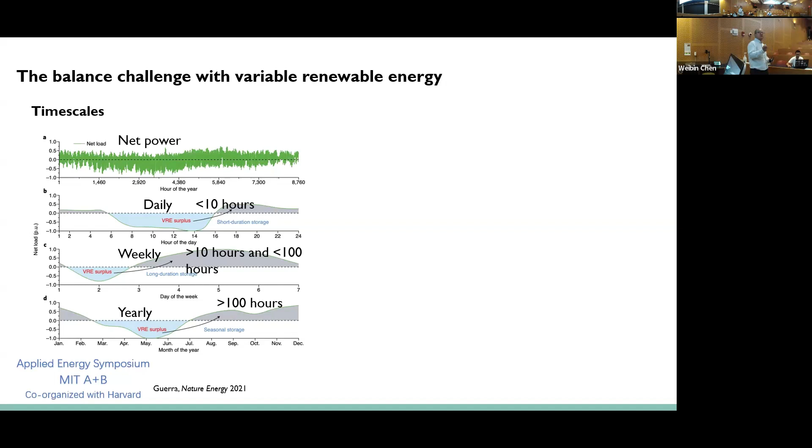So as mentioned, the topic I'll talk about is energy storage and flexible technology in the context of energy system and the network. Within the decarbonization or net zero transition, there will be a lot of challenges around the temporal spatial variability and also the flexibility. So here's one example in a typical zero carbon, net zero system using solar and wind. Different time scales require energy shift, from daily, like several hours, to weekly, between 10 to 100 hours, and yearly, mainly for seasonal energy storage or energy shift to support the balance within a zero carbon system.

But also there are different locations. The first one is mainly from the energy balance perspective. For the second one, you definitely have infrastructure transferring energy from generation through the transmission and distribution lines to the demand. Depending on where you are, you probably also have limits or constraints on what you can use and how to use your energy storage or different technologies.

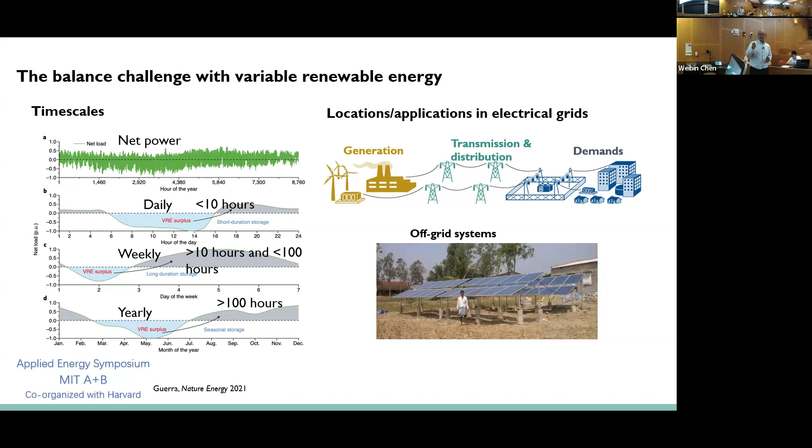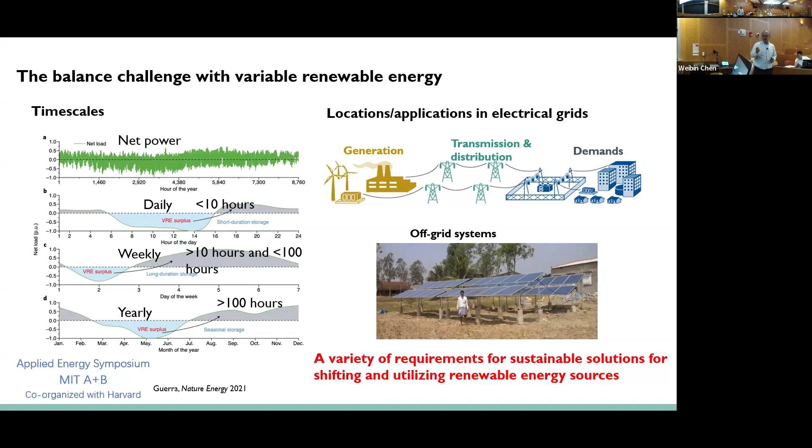And the third one: we are all talking about an established national grid or energy system. There are also problems like off-grid systems, in rural areas in developing countries, or in the US or UK, developed countries, remote areas that need off-grid or distributed energy system solutions. So there are a lot of requirements for solutions to address the temporal spatial variability induced by the renewable energy system. So our group focuses on mainly two different topics.

First, we develop system approaches, energy system and network. I'll give you some examples of what I mean by this. We believe in the net zero transition, the electrical grid and renewable energy will be the fundamental sources to supply all other infrastructure, like water systems, the carbon cycle, the food supply chain and many other systems we are currently using. So we want to understand the interlink between the different systems and how we can use renewable energy to support other system transitions, including the electrical or energy system transition.

At the same time, we also look at whether we can leverage the other infrastructure to help balance renewable energy, addressing the temporal spatial variability I mentioned in the previous slide. So to improve cooperation between different systems, we also look at what we call interfacing technology. Basically, there will be something like energy storage, so you can store and convert energy in different forms. Also carbon capture, which can link the energy system with the carbon cycle or carbon capture, storage and utilization system.

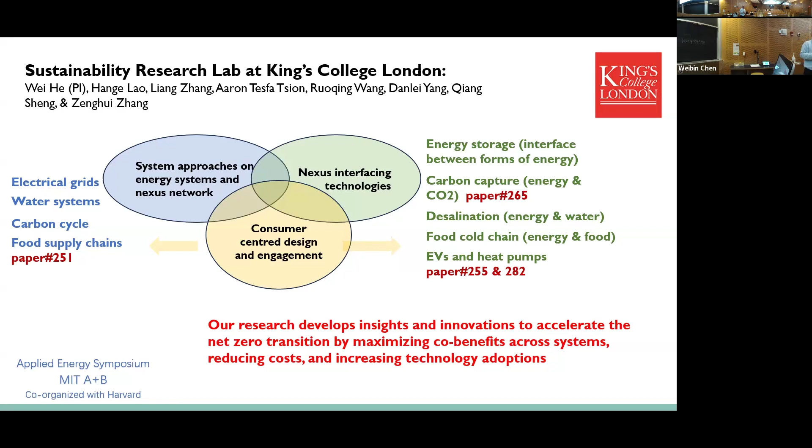One of the other very important points we are focusing on: we want to integrate user preference, behavior, or perspective into the technology design to try to increase technology adoption and accelerate the transition. Because we have several other papers focused on different topics, in this talk I mainly talk about energy storage and flexible technology for sustainability in our group.

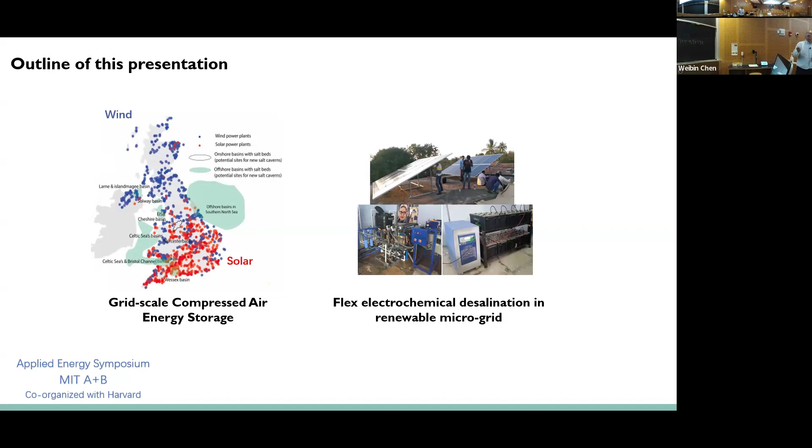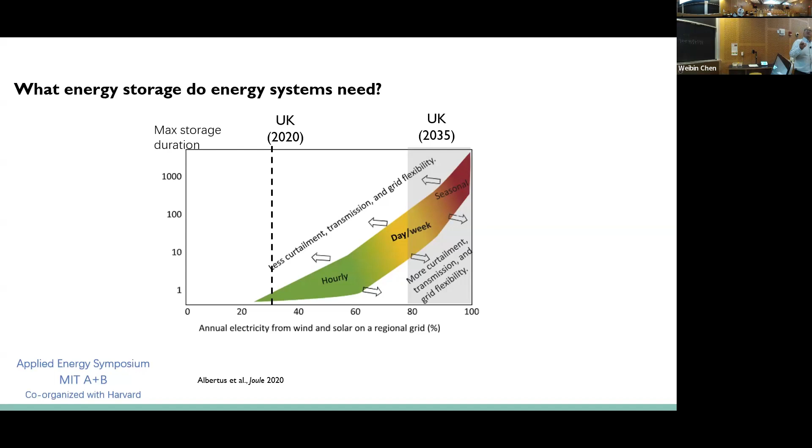But with increased penetration of renewable energy on the grid, for example in UK which aims to have a low carbon or net zero grid around 2030 or 2035, it means you probably need 80% plus renewable energy on the grid. During that time, you definitely need much longer energy storage to meet the energy system requirements and maintain balance. So in this context, longer duration energy storage, which needs to deliver energy over tens of hours, hundreds of hours, is greatly needed to ensure we can have a stable and reliable electrical grid with highly penetrated renewable energy.

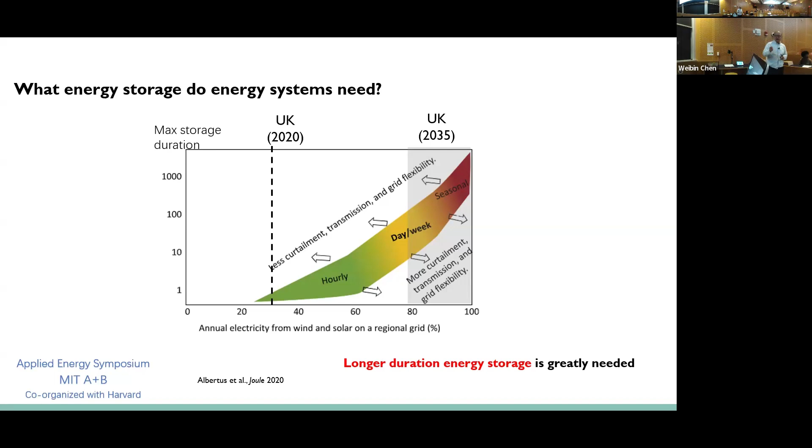When we talk about longer duration, that means you probably provide one cycle per week, so you only have about 50 cycles a year. If we talk about even longer time, we probably anticipate 10 times the duration requirement, at even 1/10 of the price point for the longer duration energy storage technology.

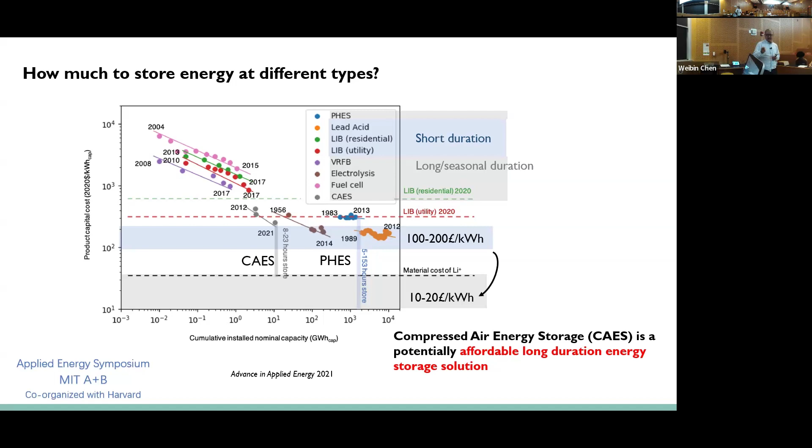So what we did, what is compressed air? That's one of the technologies we are focusing on. It's not a new technology - it was first launched in the 1970s in Germany. Basically, when you have off-peak electricity, you use a compressor to pressurize air and store the pressurized air in some container or underground caverns. When you need electricity, you mix the compressed air with a gas turbine to increase the temperature, so you have both pressurized air and high temperature pressurized air, which can produce more energy. But in a traditional system, it uses natural gas.

But in the new context of the energy transition, people want to get rid of the gas. So with the new technology called adiabatic, that means it doesn't require any external heat.

In the adiabatic compressed air energy storage, when you have electricity, you still use a motor to drive a compressor to produce pressurized air. Because the air pressure is increased, the air temperature also increases. So in adiabatic compressed air energy storage, you store the heat and the pressurized air separately. You let the heat be stored in the thermal energy storage, and you store the pressurized air in the air tank.

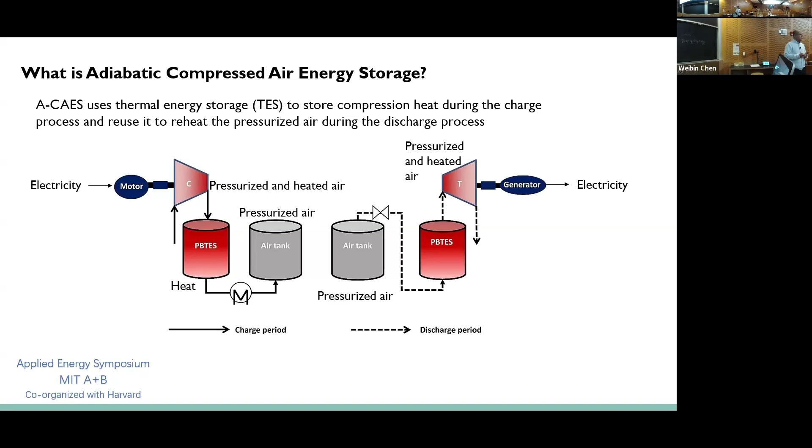So when I said we are developing the technology, basically we look into individual components. We try to see, in the underground cavern, how the heat exchange of the air at different conditions, different locations, different forms of storing air, interacts with the environment, with the cavern, with the surrounding environment.

We also do very technical detailed simulation of the thermal energy storage, the thermal plant, the thermal distribution within the plant across different designs. We look into turbomachinery design across different components, and we integrate them as a whole in the system.

So I will not talk too much about technical details, but in general, what we are doing here is trying to understand how the design parameters of individual components link with the overall system's static and dynamic performance.

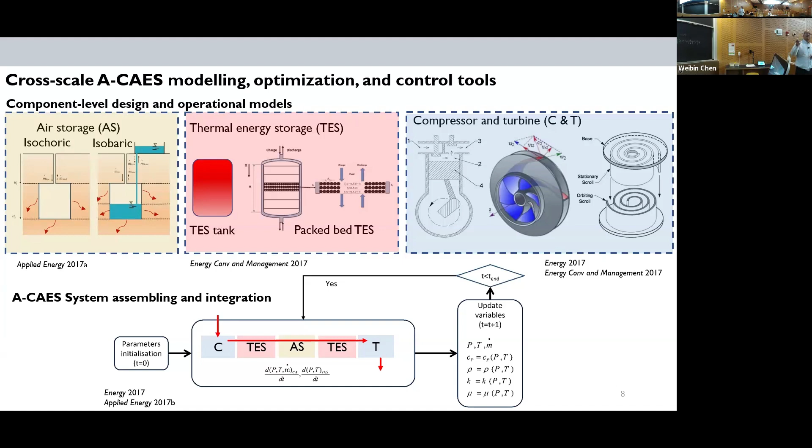Which can help us design individual components according to some system-level signals, like if we want the energy storage technology to participate in the arbitrage of the electrical market, what should we do, which component we need to operate, which component we need to optimize, and how we do that is through the whole integration modeling framework we developed.

And another example, we also want to evaluate how geological resources like underground caverns can support large scale energy storage technology to decarbonize the energy system.

So we look into the UK-based current gas storage facilities, underground salt caverns. We map all the locations on the left-hand side. The yellow circle represents the different volume of existing gas storage facilities in the UK.

And there's all the transmission lines, we built a model of the UK electrical system. We also built all the power generation, including both gas power plants and solar and wind, into this power system model.

On the right-hand side, which we have not actually considered in the model, the green and red areas indicate the potential resources available in the UK to have further caverns, for different types of gas storage. It could be used for compressed air, hydrogen, or CO2 storage.

But in general, the figure here represents another kind of feasibility study. In general, the resources available, for example in the UK, for underground salt caverns, is much more than enough in the near future, or at least for the energy transition, as far as we are aware.

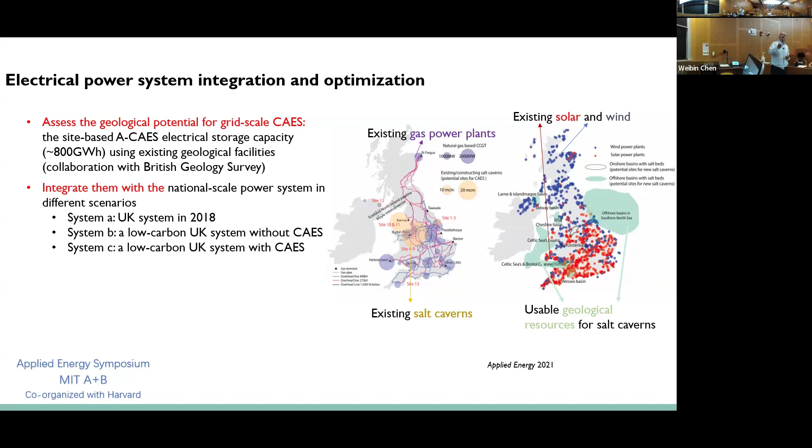In this analysis, we assume the 2018 UK energy system with compressed air energy storage, with no other energy storage available. So 3 scenarios will be considered: the real or almost real UK system in 2018, a low carbon UK energy system with increased generation from solar and wind without energy storage, and the same low carbon UK system with increased solar and wind plus 800 gigawatt hours across certain storage sites.

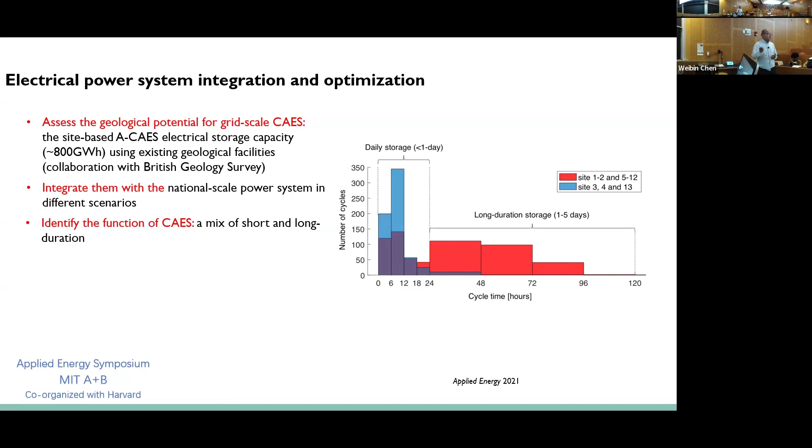The results show that depending on different operational and storage parameters of the compressed air system, different sites offer different energy storage for different durations. Some more efficient energy storage sites provide daily storage, less than 1 day operation. Others, less efficient due to geometrical constraints or variables, provide mainly longer duration energy storage. This depends on the parameters or specification of the caverns and the operation parameters in the modeling.

Overall, we compare the 3 different scenarios to understand the different function of the compressed air energy storage, because different geometrical parameters give different performance. Increasing the use of 800 gigawatt hours compressed air energy storage could increase the use of energy storage by reducing curtailment by about 53% compared to systems B and C, without and with energy storage facilities. The use of existing underground gas storage facilities for compressed air and variable renewable generation can reduce electricity emissions by 85%, with about 28% cost increase compared to 2018.

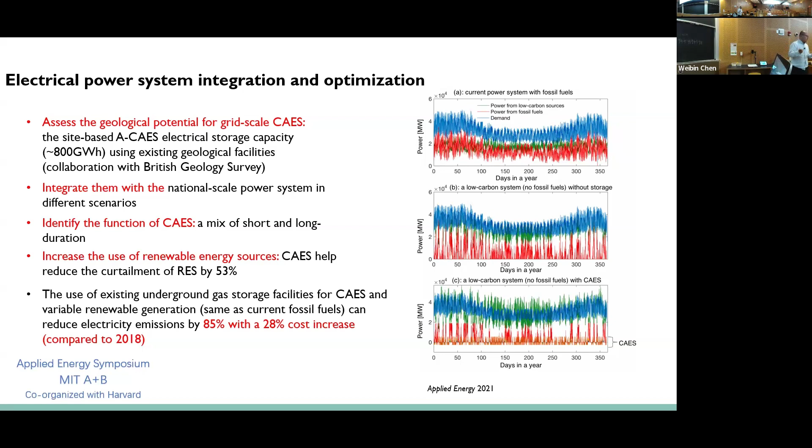In the last several years, due to the pandemic and the war between Ukraine and Russia, energy prices have increased significantly. So all the costs we're considering here are pre-pandemic costs. That means if we use current energy costs, potentially that 28% increase isn't so bad anymore.

We further increase the modeling capability for the UK, for example by breaking the UK into 12 or 13 regions, which align well with the distribution regions in the UK context. We try to develop a model to simulate how the transition happens at different locations and understand which technology to use. So we have a particular focus currently.

We try to see if we can separate energy storage technology into different types, like short-term energy storage such as lithium-ion battery, or more typical long-duration energy storage like compressed air and pumped hydro, depending on if you have the resources or not. In the UK, pumped hydro is probably kind of saturated, so we mainly look at using the parameters of long duration energy storage to represent compressed air or other similar long duration storage.

So here are some preliminary results. We're still working on that, but in general we run different scenarios to see how this energy storage technology will be deployed to achieve the least cost of energy system transition.

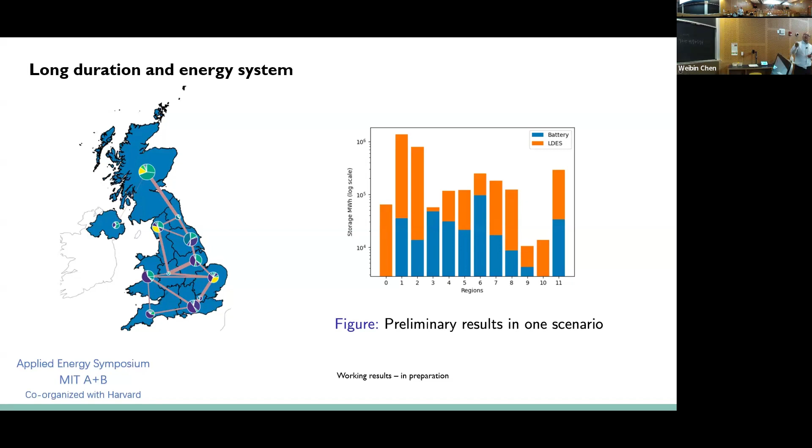One interesting point through this process is what we really want to know: the emissions induced due to the use of energy storage. There are several concepts about energy emissions induced by using energy storage, and it doesn't seem quite straightforward. Sometimes you find headlines or literature saying energy storage is one of the key technologies to help enable net zero or energy system transition. But there's also a large amount of literature or papers saying that if you use energy storage, it will introduce more emissions from the grid.

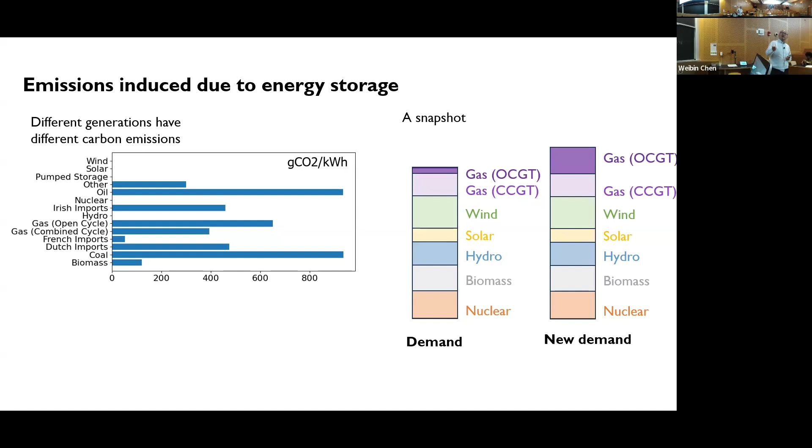The reason is that all current systems use a mix of generation. If we only consider operational generation, assuming solar, wind, or other renewables to be zero emission, many other fossil fuel based generators have positive emission. When you have demand, if we say it's original demand, but if you turn on your energy storage, that means the most flexible or dispatchable generator needs to operate longer, at higher capacity, to produce marginal generation.

So depending on how you account for this emission, there are two concepts often used in the literature. One is called average emission factor, meaning the emission due to use of energy storage comes from the average carbon emission of this generation snapshot. The other is called marginal emission factor, which is more about the marginal generators' emission factor.

So if you use the marginal emission factor, that means most likely the electricity from the most polluting generator will be used to charge the energy storage, and energy storage has some inefficiency, it's not 100% efficient. So compared to not using energy storage, the scenario with energy storage will induce more emission. So we feel like both the average emission factor and the marginal emission factor may not be perfect to describe the emission due to the use of energy storage.

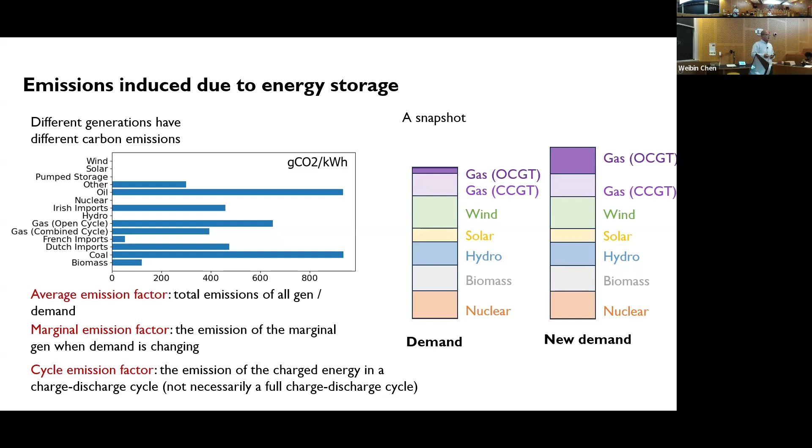So we try to develop something between the two, which more accurately captures the cycle emission factor. Depending on how you operate the system, in each cycle we want to calculate the emission per cycle. It's not necessarily a full cycle. So we let the storage technology into the system, we use a model to optimize how to use the technology to achieve the least cost, and then we back calculate the per cycle emission factor for the whole year out of this simulation and optimization.

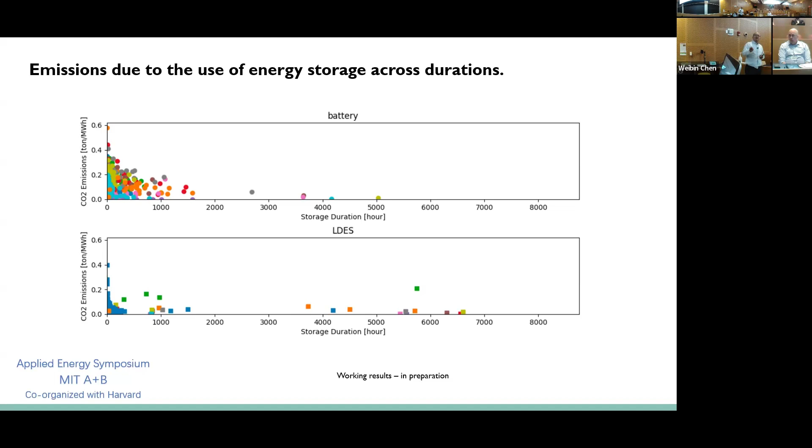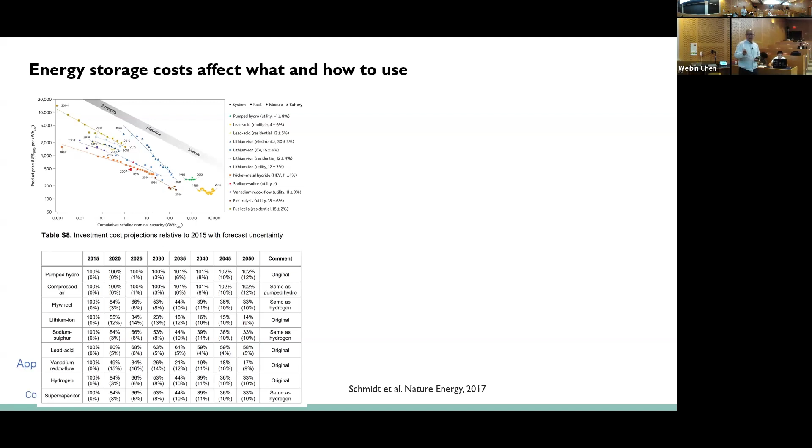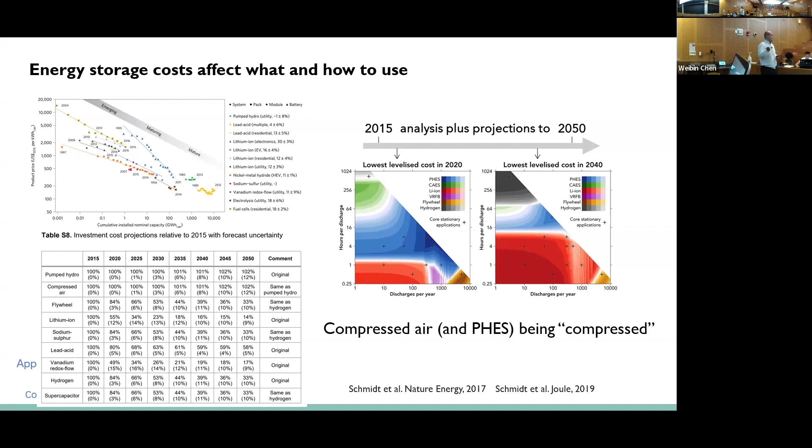So I totally understand and agree with the approach, but I think the key here is the parameter. I want to mention the parameter clearly plays a role in determining which one will be the best technology or least cost technology in a future system.

So we try to fill the gap of data and knowledge on the cost of compressed air. We look into literature and other reports to see if compressed air is quite similar to pumped hydro, where there is no potential to reduce cost, or quite similar to the lithium-ion battery, which can still learn by doing through innovation and research to reduce the cost. If you remember, at the beginning I mentioned that compressed air has a lot of new operations and new technology compared to traditional technology.

For the thermal energy storage and the high pressure turbine machinery, it's still quite new technology, with quite a lot of research challenges to be overcome. We found that in most pilot demonstration projects and in the literature, the cost reported by the authors or project owners keeps decreasing with the increase of capacity installed across the world. So there's also some ongoing work.

But here I want to highlight that in energy modeling and network modeling and optimization, the cost parameter plays a major role in determining which technology could be the better technology in the future scenario. However, the visibility or availability of data for each technology is entirely different, which may also affect decision making, policy making, and even investment decision making.

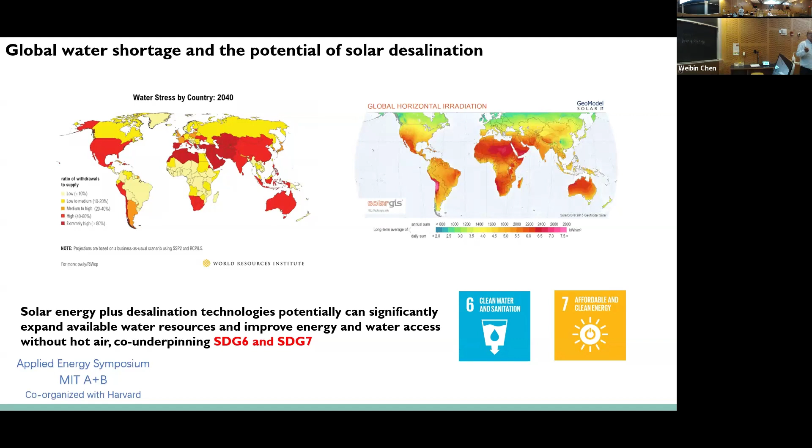So the second part, I'll talk about flexible demand. In this particular case, we focus on an off-grid solar desalination system, to address the water shortage and the climate transition problem. We want sustainable energy to provide much needed water, particularly for developing countries.

The technology we are using is called electrodialysis, an electrochemical process. Basically it has electrodes, a cathode and anode, and in between you have several pairs of ion exchange membranes. When you apply an electrical field, because of the selectivity of the membrane, the cation exchange membrane only allows positive ions to pass, and the AEM only allows negative ions to pass.

As a result, the ions in this channel transport to the nearby channel, so this channel will be depleted as the flow passes through, and this channel becomes more and more concentrated. So you have water flowing out with lower concentration, and another channel with higher concentration. That's an electrochemical separation process using exchange membranes as well as an external electrical field.

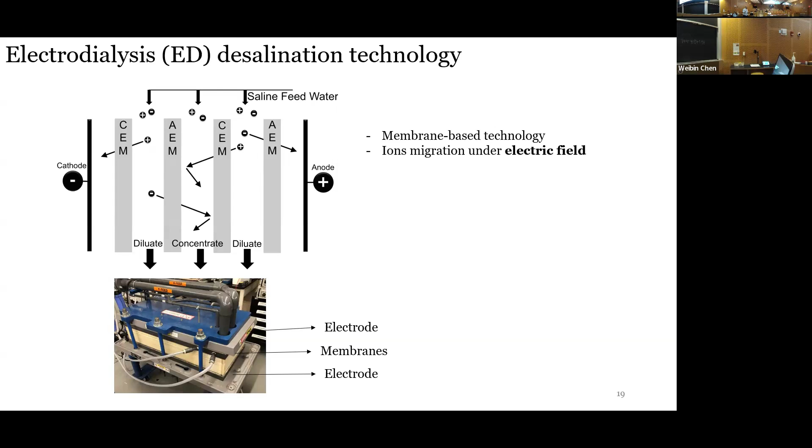In this technology, the energy consumption includes both the energy due to the voltage applied on the electrodes, as well as the pumping power to pump the water through the membrane channels. Putting the diagram into a practical system, here is a commercially available electrodialysis stack. It has around 60 or 80 pairs of membranes, with an electrode on the two sides of the stack.

The reason we chose this technology is that it has a very high recovery ratio, about 60 to 80%. This means 60 to 80% of the saline water will be converted to fresh water. The dilute water will be 60 to 80%, and the concentrated water will be 40 to 20%.

And at low concentrations, like underground brackish water desalination, it has higher energy efficiency than the filtration-based reverse osmosis used as a benchmark, which justifies why this technology has potential energy efficiency. What we are proposing is very straightforward as well. We try to improve the flexibility of using the ED technology.

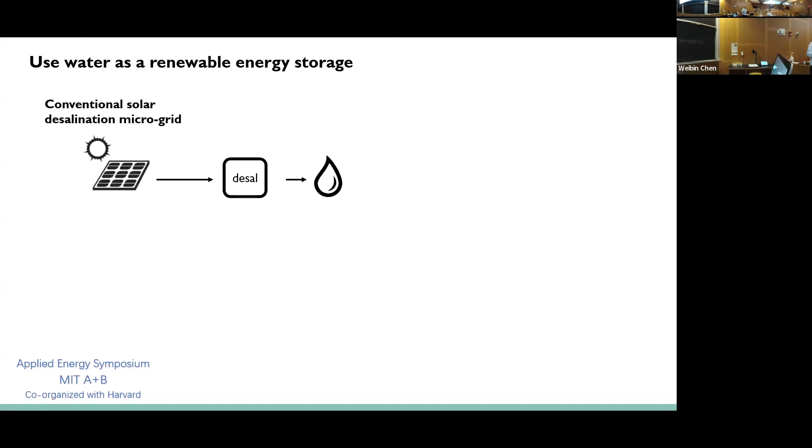So the first idea: because the product of this technology is water rather than electricity. In an off-grid system, normally we use a battery to balance the solar energy availability or intermittency, to ensure the energy supply meets the demand of desalination and produces water. But the battery is relatively expensive, which requires high capex, and it also requires maintenance effort, which makes it challenging off-grid in remote areas.

And because batteries are very expensive in the off-grid rural context, sometimes you may have very limited battery capacity. You may have some solar curtailment, and overall it may lead to high cost. So what we propose is to add water storage, which is very simple, like a water bottle or water tank. Because water is your only product, instead of storing electricity, just store water. And you can reduce the capacity of the battery, which can reduce the cost.

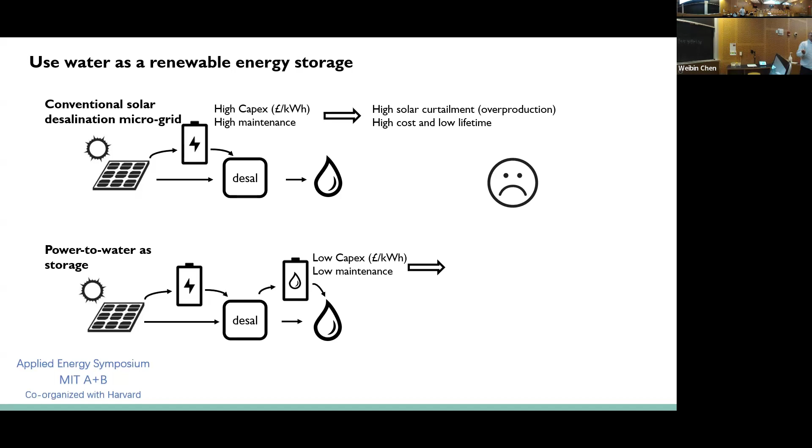So we take the concept into the system design, and we try to see if water storage can be equivalent to battery storage to produce water to meet the water demand. Without changing anything else, we're just introducing one more component, which is very simple and low-cost. We found that using water storage can potentially reduce the battery storage capacity, and we can reduce the cost by 45% over the lifetime. This is actually very straightforward, because you probably do it every day in some other similar cases.

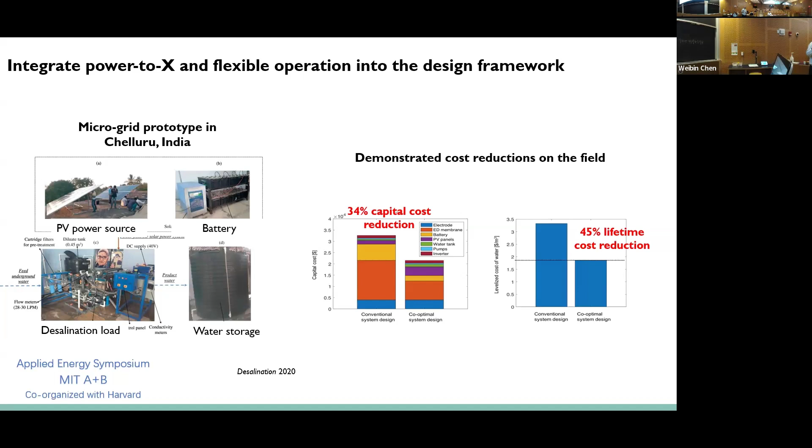But the very interesting result from this experimental or pilot testing is that in an optimal system, even if you use both water storage and battery storage, we still have 46% of the available solar energy unused. The reason is mainly the balance between the intermittent solar generation and the cost to store in battery storage. If you want to reduce the redundancy or unused solar energy, you probably want to increase your water storage or your battery storage, but due to water quality reasons, we have an upper limit for water storage.

So if you want to increase the efficiency of solar energy use here, you may want to increase the capacity of the battery. However, because the PV cost and the battery cost are so different, the optimal result would be to waste 46% of the solar panel output and only store a little bit of solar in the battery. That's a practical, economic reason that makes the solar energy utilization relatively low. And also because this ED demand is quite static, we want to use it as long as possible, with longer work days.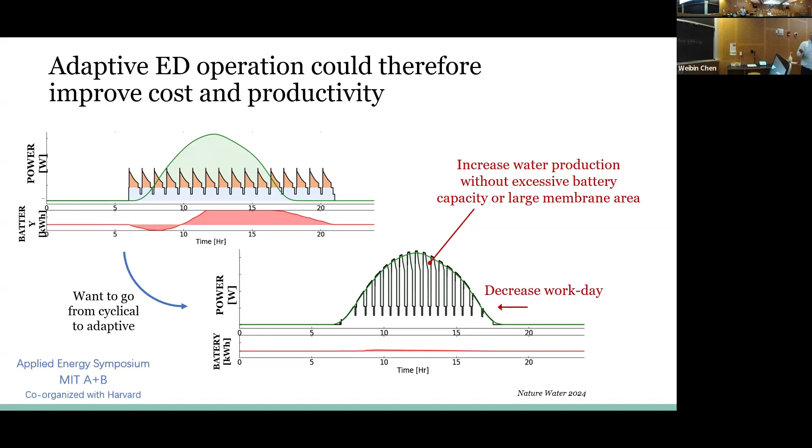So now, in addition to using water storage as a flexible solution, we also want to make the demand very flexible. That means we can try to increase the water production rate without using the battery, use the 46% unused solar energy, reduce the work time, and also minimize the battery storage. So we do the modeling optimization, and we also build a system to validate and demonstrate the performance of the flexible operation of the ED system. Here is the result for one solar day.

Some of it already exceeds the maximum power available to the ED system. But within the operating range, it can closely follow the solar power, no matter how fluctuating it is. The key innovation we showed in this research is that we not only make it flexible, but at the same time we maximize efficiency at different levels. It's not only about changing the power to match the solar availability; we also ensure that at different levels we can achieve the maximum efficiency.

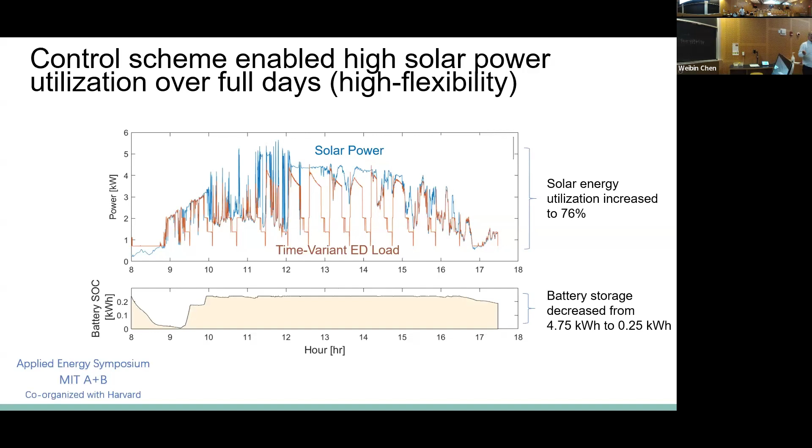As a result, we increase solar energy utilization to 76%. If you remember the previous one, it was about 50-something, and we can reduce the battery storage capacity from about 4.75 kilowatt hours to just about 0.25 kilowatt hours. We also did the testing across different days: a very cloudy day, a clear sky day, a day with sunshine and clear sky.

And then we found that no matter how fluctuating the solar power is, the system can consistently produce the amount of water required according to the production rate. And if the daily energy available from the solar is similar, the water production rate is also similar. So that means the system can produce water independent of the fluctuation of the solar power, mainly based on the energy available from the solar.

So it becomes very flexible. So we put everything into the technical performance and the operating time, so that it can increase the solar energy utilization, reduce operational time, and reduce the battery.

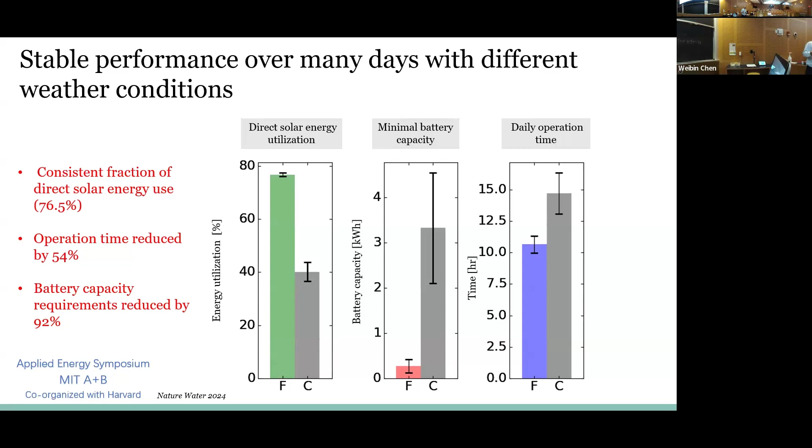If we put everything into the cost and compare the different systems, here we introduce another alternative, or current, system we call grid RO. It's used in one of the village water solutions in rural India. This is a current solution which provides reverse osmosis technology powered by on-grid electricity.

And in India, because most of the generation still relies on coal-based generators, we can say this one has relatively high emission, and we use solar-based technology, where if we don't consider the embodied emission, operational emission is almost zero. By making the ED technology from constant to more flexible and introducing water storage, we can consistently reduce the cost and remove the cost of the battery storage.

As a result, the lifetime cost of the water could be almost the same, even a little bit lower, compared to the current relatively high emission solution. So we make the technology cost effective and at the same time we minimize emission.

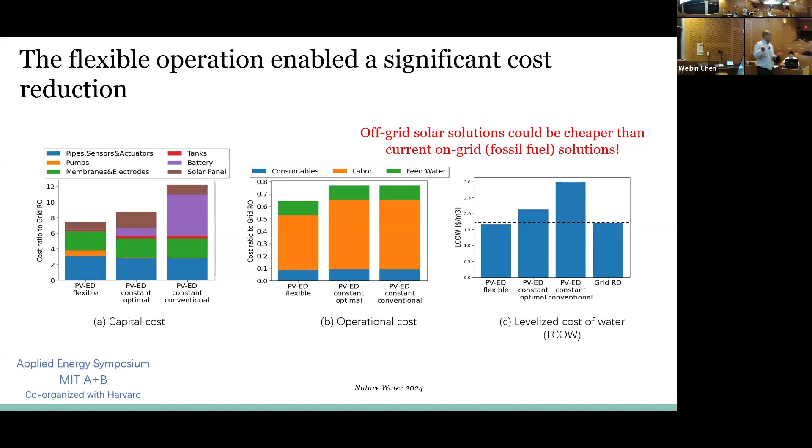So the conclusion is quite high level. First, energy storage performance and cost lead to different system optimization results, but data availability is unequal across different technologies. Second, co-delivery of energy efficiency and electrical flexibility can create opportunities to reduce the cost without using advanced or more energy storage technology.

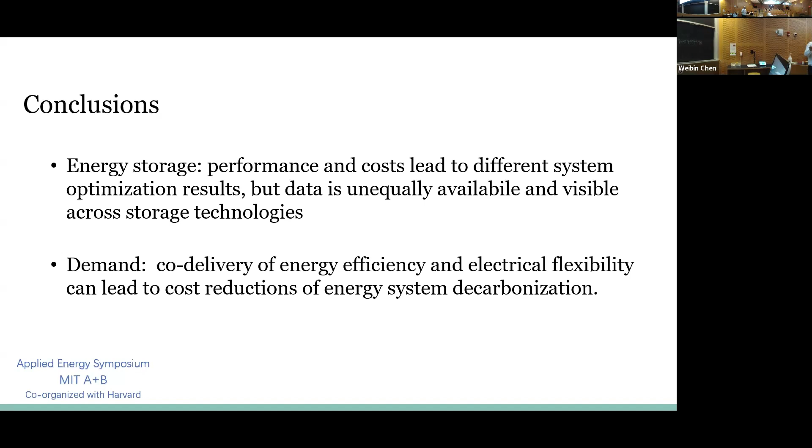Can I start with a question? Sure. A couple of years ago, we worked on a proposal for agrivoltaics for Africa. One of the main points was desalinization of water there. How ready is this technology to go to the field for real use cases and implementation? Remember in Africa, sometimes the temperature and weather demand specific conditions on the hardware and implementation.

Oh yeah, both systems I mentioned here are tested in the real environment. This one was tested in New Mexico, which is also a very harsh environment. And the first one was tested in India. Probably not as hot, I'm not sure, but it's also a very hot and harsh environment compared to a well-controlled environment.

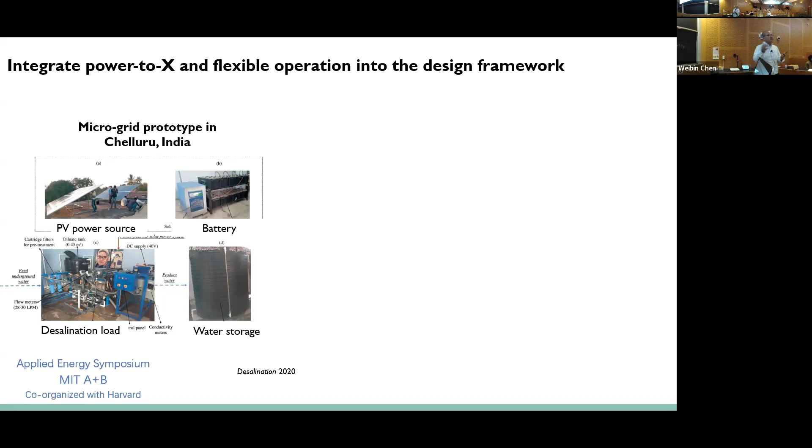And from the other point of view, even for this new, more advanced innovation, all the components are commercially available, because our research is more about how to operate the system rather than how to design a new system. So from a supply chain perspective, everything is commercially available, and we also tested it in the real environment. During the testing period there was no major issue, but it's still a new technology, a new way to operate it.

How good it is over a much longer term still needs to be tested. But in general, compared to other technologies, practically this one could be deployed probably immediately, and over time you can know better how it performs, over years or 10 years, to see how it degrades. That's also something we need to take care of over time.

Okay, perfect. Just one second thing, very fast. Every time we deal with desalinization, we had problems with water contamination, heavy metals and all the kinds of contaminants you can find there. Do you address that somehow? Short answer, I think it's kind of out of scope.

Yeah, the short answer is no, because this technology is mainly about removing the salt dissolved in the water. If you have more contamination, we can add pre-treatment to deal with other contaminants or larger particles, right? And we may also have post-treatment to kill bacteria or other contamination in the water. But this one is mainly to remove the salt in the water.

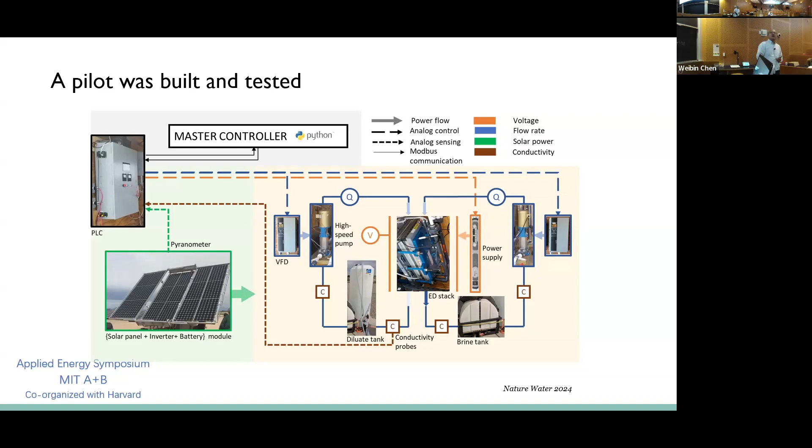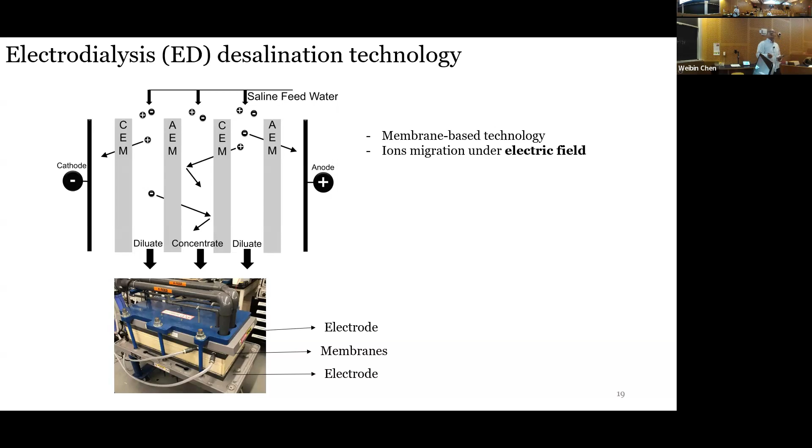In terms of the physical model, I think if we talk about physical model, there is always room to improve. But I would say it depends on what accuracy you are satisfied with. So I can give an example.

And the other companies also have their in-house models to design and optimize the system. I think there is a company in Canada that is building a 100 to 300 megawatt system. Probably it's still ongoing. In China, I can't remember the exact number, but they have at least 3 to 5 over-100-megawatt-hour compressed air energy storage systems that have been built and are in operation or close to operational.

So I would say the model could be relatively ready, almost ready, or already ready to build systems, make them operational and start to provide service in real-world applications. Thank you.

Thanks a lot for your presentation. I also had a question on compressed air energy storage, more so on the scale of this technology. What is the current status? Is it viable at distributed or decentral scale for community projects or microgrids? Yeah, I think that's a good question.